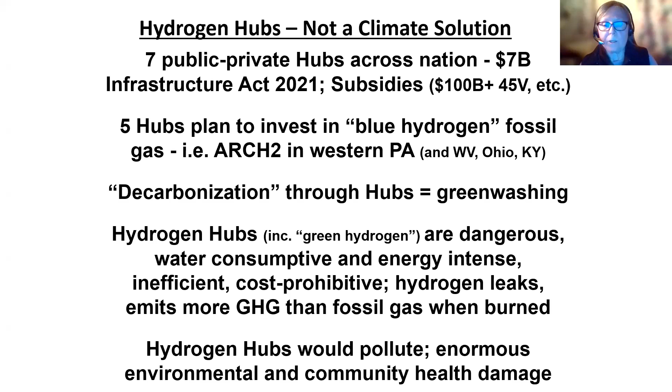So next slide, please, Peter. So the Mid-Atlantic Hydrogen Hub was announced in October in Philadelphia by President Biden. $750 million has been earmarked, but one of the reasons we think we can actually defeat this MACH2 hub is because the money actually has not been given out yet.

They have to jump through a bunch of hoops in order to get the money over the next year or more, and we think that we might be able to derail it. And we're going to work like hell to see that happens.

Reportedly, there are 17 sites. They're located throughout the state of Delaware, southern New Jersey, and southeastern Pennsylvania, including the Delaware River region, which they define as along the I-95 corridor going up to Trenton, New Jersey. They will use nuclear, fracked gas, hydropower, wind, and/or solar, according to the MACH2 abstract. And that's the only thing we have in writing, so we have to go by that.

And that means they will employ what's called blue hydrogen. Again, Professor Howarth will elaborate on that. They will also, quote, reuse and revitalize significant existing pipeline infrastructure and terminals. This was one of their big selling points.

Yes, there's a lot of pipelines, mainly as a legacy of the oil refinery days here in the Delaware River Watershed. They expect to have on build out a production of 300 plus tons of hydrogen per day, and 100,000 plus tons of hydrogen every year.

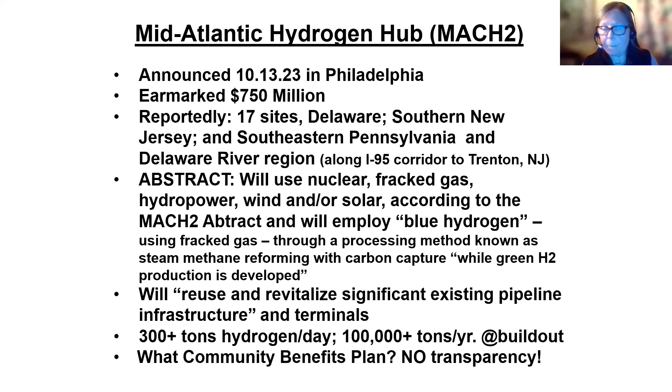Next slide, please, Peter. So a lot of the specifics about MACH2 are under wraps, but we have been ferreting out information, and we're going to share what we know tonight. We're actually going to have a series of webinars as we learn more.

But right now, we know that the sources and the sites of production include the PBF refinery, which is the Delaware City refinery in Delaware. There's actually an existing gray hydrogen plant there now that PBF uses. But PBF, the MACH2 PBF, say they want to build a new hydrogen plant, and they want it to be fueled by on-site solar, hydropower, wind, and nuclear. And they are planning a 600 ton per day output of hydrogen.

Now, the wind power has been delayed because Ørsted has pulled out from building their wind facilities off the coast of New Jersey, and we don't know what that's going to be replaced with. South Jersey Industries was going to harness that for Mach 2. We just don't know what's going to happen with that, and that was their major green power claim to fame.

The PSE&G Salem nuclear plant and Holtec modular nukes are going to be discussed by Maya Van Rossum a little later in the session tonight. And also orange hydrogen is used.

That's where you pump carbon-rich water down into iron-rich rock formations and extract out hydrogen. Sounds like fracking, doesn't it? Well, it does require injection wells. We're learning about that now. We don't know anything about how they would do that here in Mach 2.

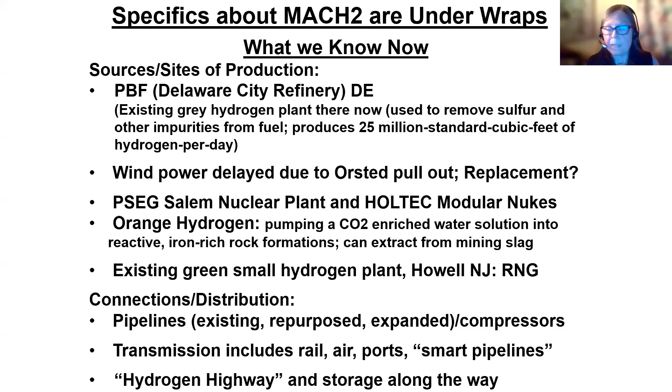So what we do know continued is the end uses. Basically they have plans for industrial, transportation, electric power generation, and residential and commercial end uses. So they do plan to burn it.

They plan mega turbines. And we want to note that it's important that nitrogen oxide pollution from the burning of hydrogen will be exposing frontline communities to an additional burden of devastating air pollution. Burning hydrogen produces six times the amount of nitrogen oxide than burning methane. It's also a powerful greenhouse gas, and of course it's an ozone precursor, and we don't meet federal air standards because of our ozone conditions here in the Delaware River Valley.

It's the last thing we need. Public transit, both in Delaware and Philadelphia, SEPTA and DART in Delaware, plan to fuel and burn hydrogen in vehicles.

Also, they say they're going to build fueling stations along I-95 and truck fueling along the pipelines where they will have storage hubs in order to fill the trucks up and take it to other endpoints, perhaps out of our entire region.

Chemical giants DuPont and Croda in Delaware say they want to use the hydrogen, and they're part of the Mach 2 partnership. Hilco is also a partner, and we don't know how Hilco will be involved. They don't say. It's the former PES refinery in Philadelphia.

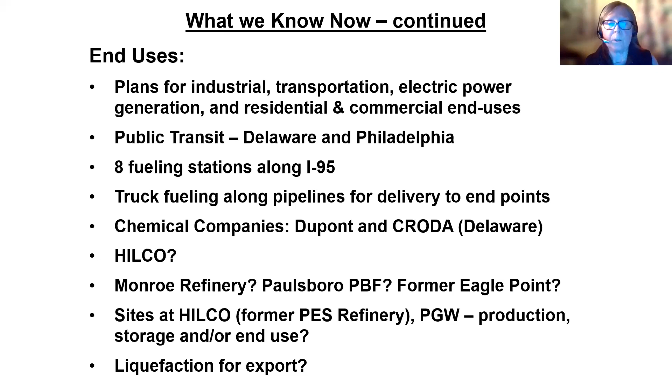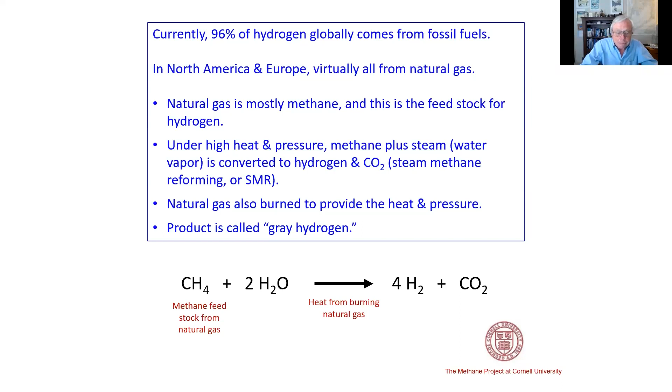That's important to remember. And the product we call gray hydrogen. It's got a large greenhouse gas footprint.

So blue hydrogen is exactly the same thing, except there's some effort to capture some of that carbon dioxide that's created from the chemical breakdown of methane into hydrogen and carbon dioxide. And this is a new term, a new concept. It first came around only 8 years ago. The French company Air Liquide came up with it. Since 2017, particularly since 2018, it's been heavily promoted by this group called the Hydrogen Council.

The Hydrogen Council is 100% a product of big oil and gas. The original members are BP, Shell, Total, Exxon, and their job is to try and sell blue hydrogen to the world. To date, only 2 companies have actually tried to produce this blue hydrogen, one plant in Texas and one in Alberta, and I'll show you some data from those in a minute. Next slide, please, Peter.

A little bit of background first on how this industry marketing campaign came about. We're increasingly seeing that carbon capture and storage, capturing carbon dioxide and permanently storing it, is one of the 'solutions' that the oil and gas industry is throwing around. They're promoting it very, very heavily at COP28 this very moment. This has been attempted for decades for coal-burning power plants, literally going back to the 1970s, and the results simply are not impressive. It's extremely challenging to do.

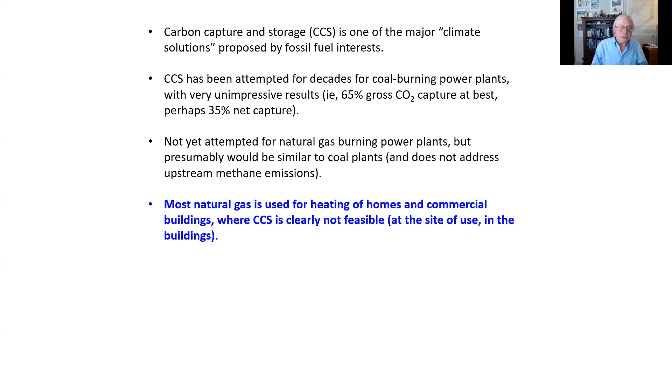To date, no one's really attempted to do this for natural gas burning. I'll come back to that in a minute, but it's probably similar to what coal plants would do. But importantly, most of the natural gas that's used, certainly here in the northeastern US, but also in Europe and across Canada, most natural gas is used for heating of homes and commercial buildings, not electricity production. And no one thinks you can have carbon capture in individual homes. It's clearly not feasible.

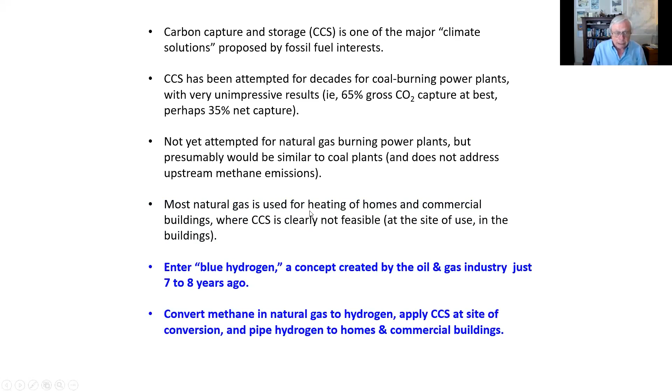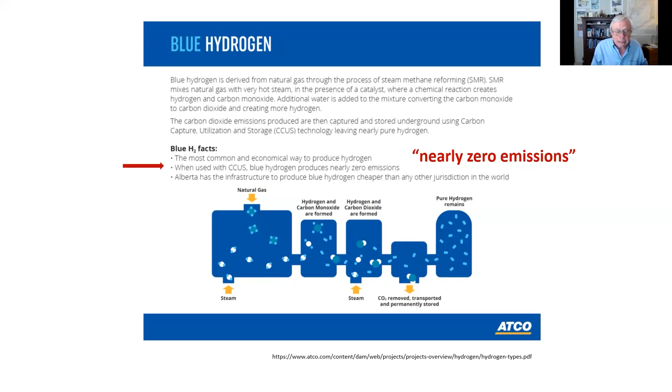Next slide, please. And so that's where this concept of blue hydrogen came in. Again, it's a recent creation from the marketers at Big Oil and Gas. The thought is that we take natural gas at a central plant, make it into hydrogen, do the carbon capture at that central plant, and then deliver hydrogen through pipelines to people's homes instead. So that's where the idea originates. And industry has highly promoted this as a nearly zero emission, sometimes a zero emissions technology, they say. This is from the Alberta company that's tried to do this. Next slide, please.

Well, it turns out that the greenhouse gas footprint of this blue hydrogen is actually quite large. Mark Jacobson, an engineer at Stanford, and I published a peer-reviewed paper on this back in the summer of 2021, not that long ago. One of the very, very few peer-reviewed analyses that looks at either gray or blue hydrogen. There are only two - before our paper there was really only one other paper that ever looked at blue hydrogen. And ours was the first to include methane emissions and not simply look at carbon dioxide.

That's important because when you're using that much natural gas - and again, you're using it as the chemical feedstock as well as the energy source - you can't develop and use natural gas without having some methane emitted even before you get to the plant. It's fundamentally from drilling, fracking, transporting, processing gas, you're going to have some methane leak to the environment. And methane's an incredibly powerful greenhouse gas.

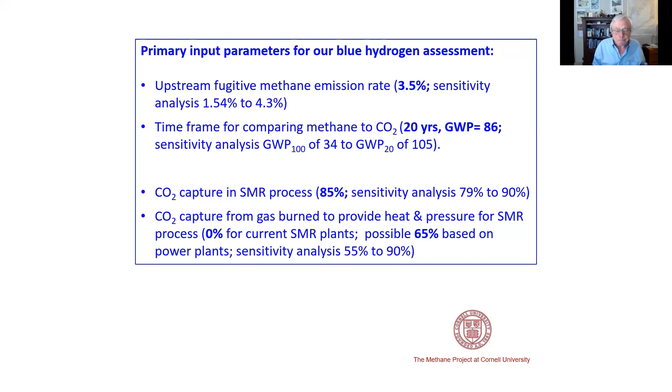And the take-home point is that when you look at gray hydrogen, the traditional hydrogen that's been made for 130, 140 years, and then move to blue hydrogen, the next bar over, blue hydrogen has a slightly reduced greenhouse gas footprint compared to gray hydrogen, but not by much. Those carbon dioxide emissions are lower, but they go nowhere near zero. And the methane emissions are higher because you're using more natural gas to power this whole thing. And again, there are methane emissions associated with that.

And then if we compare with natural gas, diesel, oil, or coal, this blue hydrogen has a larger greenhouse gas footprint than any fossil fuel. You're better off simply burning natural gas if that's your goal in terms of reducing greenhouse gas emissions. Next slide.

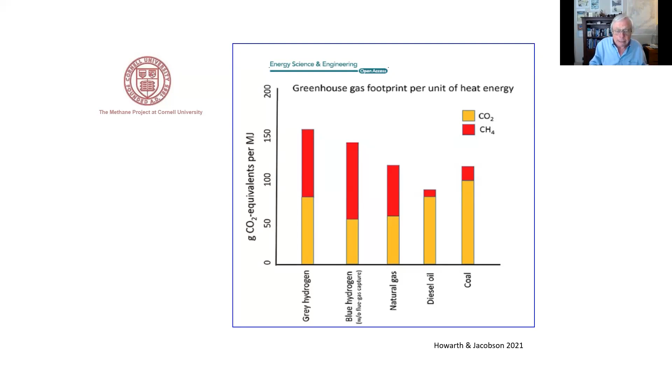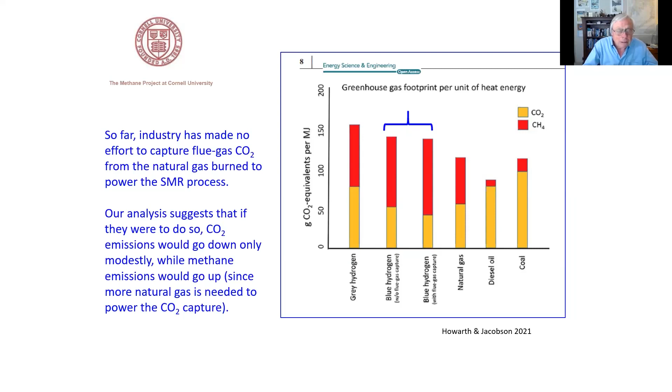We haven't warmed the planet quite that much because some substances, sulfur gases in particular, act to cool the planet. So the net has only been about 1.1 as of a few years ago, it's warmer now. But when you look at the next bar and compare carbon dioxide and methane, carbon dioxide is the most important greenhouse gas, but methane is a close second. In fact, methane is responsible for about a third of all global warming that has happened since the end of the 1800s. So it's really important.

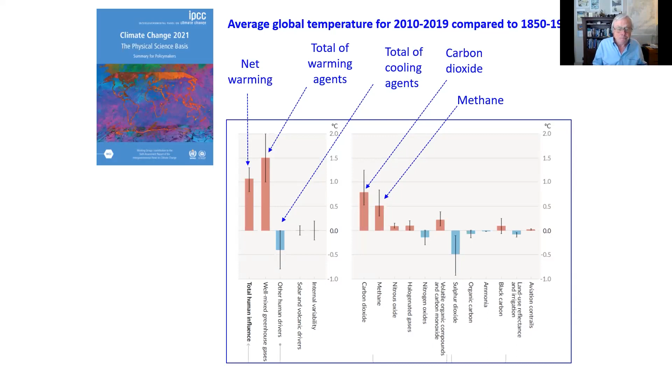And that's what that says. Next slide, please.

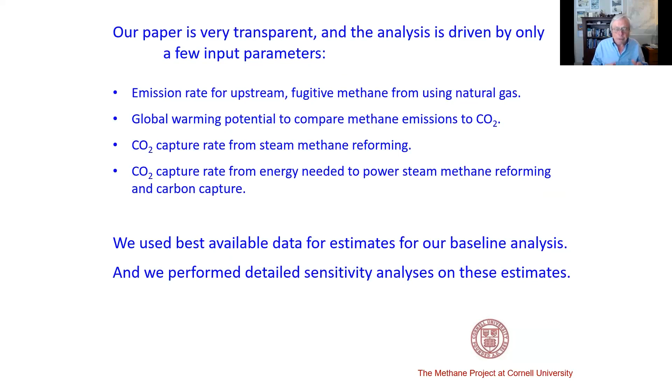So again, our analysis is very simple. It's actually very conservative, but we did a sensitivity analysis as well. I'm just going to summarize that for you.

All of the emission numbers are higher because of those changes. They go up across the board. Bottom line is blue hydrogen is still not much better than gray hydrogen, and it's still far worse than just burning natural gas. And then the best case is if we go down to a very optimistic, I think unbelievably low estimate for methane emissions of 1.54%.

And we look at methane compared to carbon dioxide over a 100-year time period, which undervalues the true damage done by methane. All of the emissions go down, but the fundamental conclusions are still the same. Blue hydrogen in this case is still not that much better than gray hydrogen, and it's about the same as natural gas. Maybe no worse than, but it's no better than either. There's no reason to be making blue hydrogen.

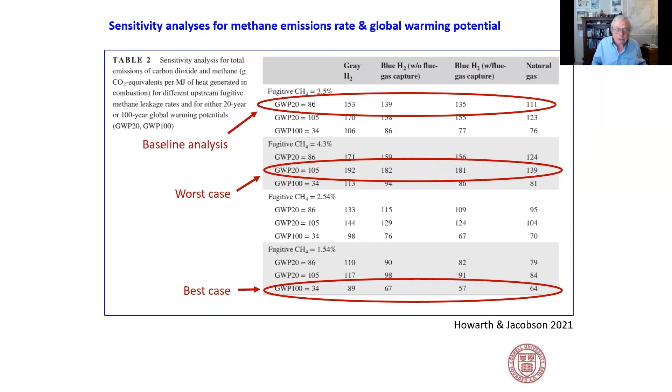Next slide. I'll skip over that, in the interest of time, and move on to the next slide.

I'm quite confident in our methane emissions number, but I wanted to highlight this because the oil and gas industry hated our paper, and social media was alive for months. There was going to be a reply coming out proving we're wrong. That was finally published in March of 2022, and it's a bunch of people with close ties to the oil and gas industry. Basically they had a couple of criticisms, but one was that we use real world data for efficiencies of carbon dioxide capture, and they said we should instead use what industry models it might be able to do in the future, although they've never been able to do.

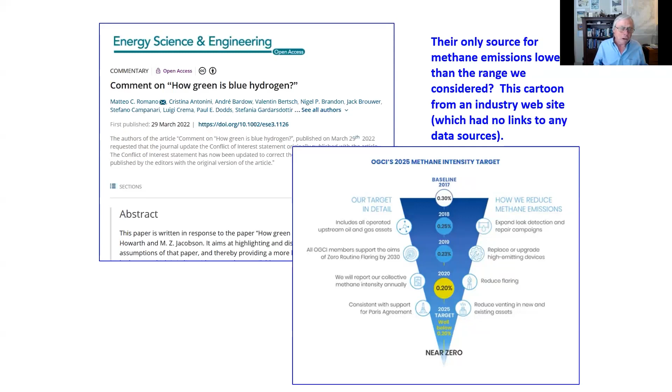So I said, well, okay, believe that if you like, I don't. But the other is they said our estimates for methane emissions were too high. In fact, the only source they provided in their paper indicating methane emissions lower than we used in our sensitivity analysis is shown in this little figure here. It's just a cartoon, from an industry website. This is all that's on the page from that whole industry website. There's no links to any data whatsoever. It simply says that industry is doing better and methane emissions are low, and therefore we're wrong. So whatever. Next slide, please.

Irritating beyond belief. I just want to make one other point. Our analysis gave low estimates for the greenhouse gas footprint of hydrogen in that we did not look at the role of hydrogen directly itself. At the time, we weren't really thinking very heavily about that. There's been a lot of science in the time that our paper came out, which is only in the last 28 months. But even though hydrogen itself is not a greenhouse gas, putting hydrogen into the atmosphere does increase global warming because it affects other greenhouse gases, particularly methane.

It makes methane hang around in the atmosphere longer, creates more ozone, and puts more water vapor into the stratosphere, which warms the planet as well. So we didn't include that. Things are worse than we thought. And by the way, if you think methane emissions and leaks are bad, hydrogen is far worse. It's a smaller molecule, the smallest molecule in the universe. It's very slippery, very leaky, very hard to contain. It will leak. Next slide.

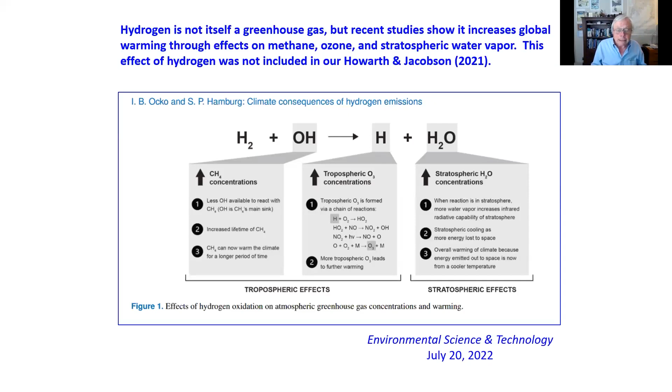Just one or two more points: blue hydrogen's terrible from a climate perspective. I hope you have been convinced of that.

I want to point out that in the past, hydrogen's use has been almost entirely as a chemical feedstock, not really as a fuel. Progressive energy planners have been talking for the last decade or so about a role for hydrogen in an energy future for uses which are really hard to decarbonize, things like making steel or maybe air travel. They're talking about green hydrogen, which is made from renewable electricity to electrolyze water and break it down into hydrogen and oxygen with no carbon dioxide involved.

So this whole idea of blue hydrogen is again a new creation of oil and gas. I hope we're killing the idea. They paid a little bit of attention when our paper came out in 2021, and one response in the fall was to drop the blue hydrogen language and start talking about clean hydrogen and clean energy, confusing green and blue hydrogen. You see that throughout the hydrogen hub planning that's been going on.

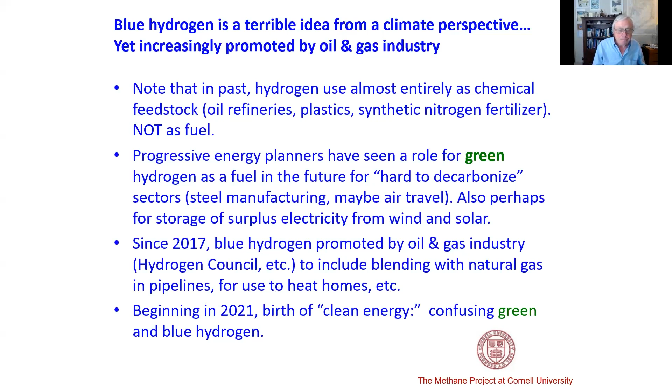So blue hydrogen should have no future at all in our energy future. What about green hydrogen? Even here, I think green hydrogen's been wildly overhyped. It's been carried along by the marketing folks at big oil and gas. So I think there is a role for green hydrogen, but it's much less than many people have suggested.

I want to make sure that you understand that we should never use hydrogen of any sort for heating homes and buildings, which is still being promoted by the oil and gas industry. There are a variety of reasons for that - it's unsafe, it's untested, but on top of that, it's also extremely inefficient.

The take-home message is renewable electricity is a hugely scarce, precious resource when we're trying to decarbonize our energy over the next decade or three. If we use electricity directly to heat homes with high efficiency heat pumps, you get 3 to 4 to 5 times more heat energy out of that than you're putting in from the renewable electricity.

If you take the same amount of renewable electricity and make hydrogen, transport it to the home, and burn it for energy, you're losing half of the energy. So the efficiencies are hugely different. Bottom line is using electricity directly for heating gives you 6 to 10 times more heat energy in your home than if you play around with hydrogen and all of the danger that's involved in that.

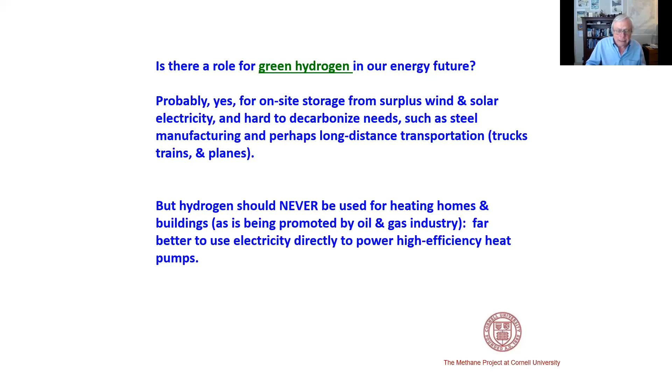I said most of that already - that's just a lot of detail, that's the fundamental message I wanted to leave you. There's a lot of other details to why we shouldn't be putting hydrogen into gas pipelines. We can talk about that at the end.

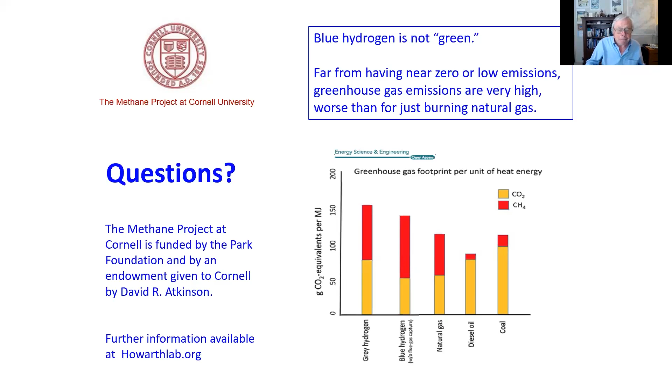So, Maya, all yours. Thank you, Dr. Howarth, I really appreciate it, and thank you for all that really helpful information and dispelling a lot of the myths that the MACH2 Hydrogen Hub folks have been proposing or advancing.

So I'm going to focus a little bit on the direct nuclear footprint of the proposed MACH2 Hydrogen Hub, which mainly is going to come from the Salem Nuclear Generating Station, but there may be other elements.

First, people want to know what pink hydrogen is. I have hot pink slides - I'm sure that woke you up. It's intended to, because it's scary stuff. So what pink hydrogen is, is where the breaking down of the molecules in order to create the hydrogen is generated through power that comes from nuclear energy.

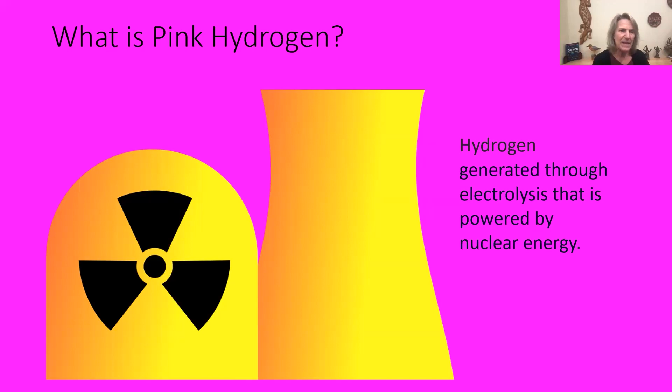According to the information provided at the MACH2 briefing on October 25th, they asserted that the only power sources that were going to be used for the hydrogen hub at MACH2 was green, pink, and orange. They ignored the fact that their own documentation and paperwork, as Tracy said right at the beginning, made clear that natural gas is actually going to be involved in this.

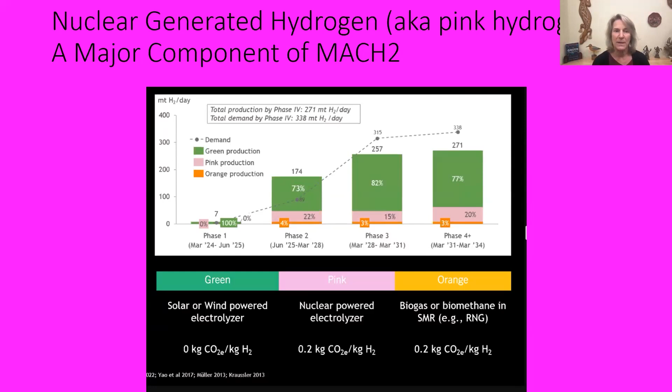Next slide, please. So when we think about where this nuclear energy is going to come from, and what the footprint of that nuclear energy will be here in our Delaware River Basin, Pennsylvania, New Jersey, Delaware region, there are two sources that the MACH2 folks have talked about. First and foremost, PSE&G is involved, and they specifically talk about the Salem Nuclear Generating Station.

The Salem Nuclear Generating Station is located on Artificial Island in Lower Alloways Creek Township in Salem County, New Jersey. This facility has been around since the 1970s, and it has a very significant environmental footprint, which we'll get to in a second. But this is going to definitely be a significant source of the nuclear power that would fuel the MACH2 hydrogen hub.

The next source of hydrogen that they talk about, or primarily focus on in their materials, is the construction of what they call small modular reactors that are going to be manufactured and installed around the region. Exactly where, we don't really know. That's yet to be seen. But I did actually get a call today from a reporter asking about the proposal from Holtec International, which is the partner in the MACH2 hub that would be primarily responsible for this, as we understand it.

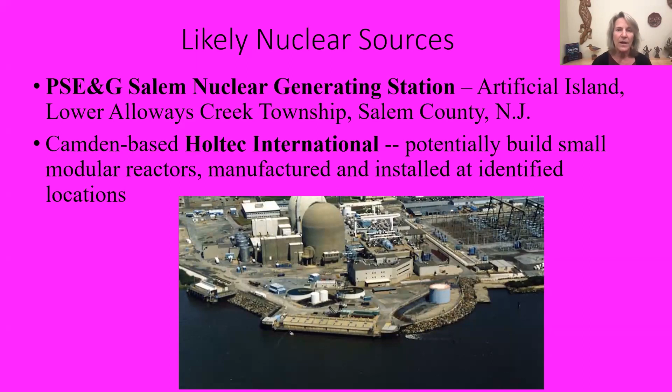Next slide, please. When we think about Salem and the footprint impacts of the Salem Nuclear Generating Station, the primary impacts are the fish kills at Salem. Because Salem was constructed and has been allowed for decades to continue operating with outdated technology, it has an outsized footprint on the aquatic life in the Delaware River and estuary.

At the Delaware Riverkeeper Network, the way we characterize it—and this is true if you look at all the numbers—the Salem Nuclear Generating Station is the largest predator in Delaware Bay when it comes to aquatic life. The harms it inflicts outsize any other source of take for aquatic life in the Delaware River and estuary. In fact, the Salem Nuclear Generating Station kills over 14 billion, with a B, fish, eggs, and larvae every single year. It's a massive footprint.

Salem Nuclear Generating Station also discharges superheated water into the Delaware estuary ecosystem, heating the water around that discharge, which has significant ecological impacts. There are some pollution discharges from the facility, and nuclear waste is of course generated at the Salem Nuclear Power Plant. That waste, as far as we know, is stored on site, either in pools at the facility, or in outside land storage operations that are part of the Salem Nuclear Power Plant compound.

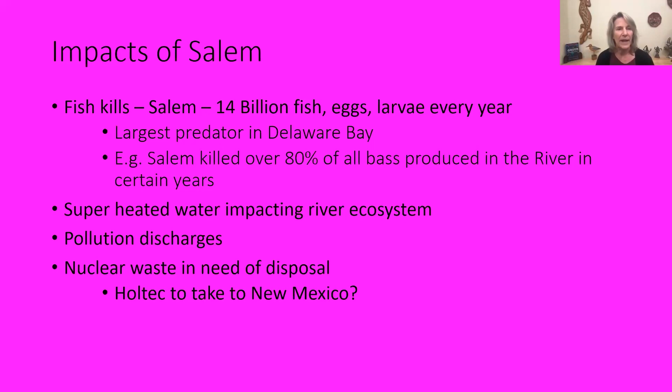As nuclear waste builds up at Salem or at any of these other operations, even these modular sites, it's got to go somewhere. Holtec is looking to take it to the people in New Mexico. And the Delaware Riverkeeper Network, as so many others, are 100% opposed to that.

One of the things to know about Salem and this footprint, through the construction and operation of MACH2, if that were to happen, and we believe it will not, we believe we will defeat it. But if it were to happen, it is going to extend the footprint of harm at the Salem nuclear generating station.

Because it is very likely going to extend the life of the Salem nuclear generating station. Actually, the two parts of the generating stations, units 1 and units 2, should have already shut down. They originally were supposed to be shut down in 2016 and 2020. In 2011, they got a 20-year life extension. They're now proposed for shutdown in 2036, 2040.

If this hydrogen hub were to advance, we are sure that the Salem nuclear generating station would get a massive new life extension. So this 14 billion Delaware River fish eggs and larvae that are killed every year, the superheated water, the creation of nuclear waste that has to go somewhere—all of that is going to expand and continue well into the future if MACH2 is allowed to happen.

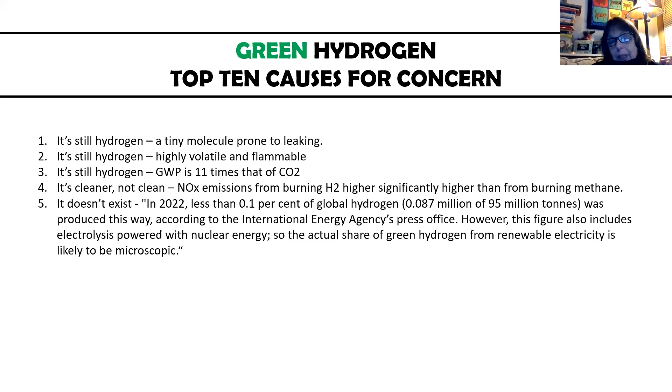There are other problems with it. It's very water intensive. Throughout its life cycle, each megawatt hour of green hydrogen consumes at least 5,000 liters of water. Compare that to solar, which uses 20 liters per megawatt hour, or wind, which uses just 1 liter per megawatt hour. Production could deplete water supplies in drought-stricken areas, and that's something very important to keep in mind.

But it's also very renewable energy intensive. According to European Commission estimates from the EU report that just came out, 500 terawatt hours of additional green electricity will be needed to reach the EU's 2030 domestic production goal of 10 million tons of green hydrogen. That is more than all the electricity consumed in France or Germany in 2022. It's also more than all the wind power generated, and nearly 2.5 times all electricity from solar power produced in the whole European Union that same year. So we're talking about requirements that are extraordinary.

I bring that up because in a hearing held yesterday, someone from the renewable energy sector talked about how improbable it is that we could ever have enough renewable energy in place quickly enough to even consider green hydrogen. Right now, Pennsylvania lags behind the rest of the country overall in renewables, but with respect to renewable electricity, we have roughly 3% made from renewables. New Jersey has 2%, and Delaware has 1%. These are all figures from 2021. So we're not producing anywhere near the amount of renewable electricity we would need to even power green hydrogen in the first place.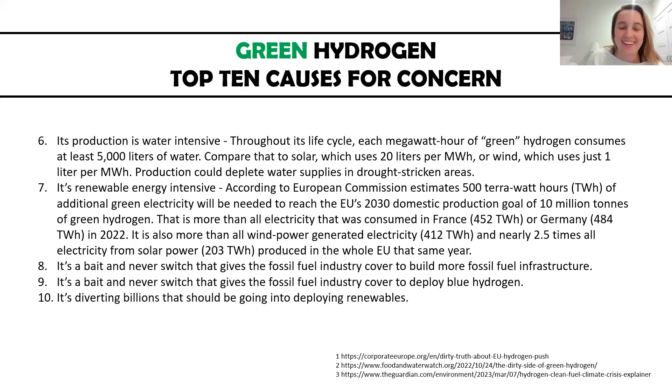So I'm going to start with a question that Maya kind of addressed, but maybe Karen, Tracy, you want to talk about it: this idea that everybody who got info from the DOE thought MACH2 was going to be all green or totally no fossil fuels. So people seem to wonder why we're talking about fossil fuels in MACH2. Well, the original abstract given to the federal government as their application for MACH2 being included in the chosen hubs says they're going to use blue hydrogen. It says they're going to use natural gas. There are other places this has been said, particularly by the building trades in various contexts, but it's clear they've said, as Karen said as well, that while we develop our renewable resources, we're going to use blue hydrogen. But they also say they're going to use it as part of the permanent plan.

Now, Maya mentioned the briefing held in October, and Colin O'Mara, who is the chairman of MACH2, made a lot of statements about how this was going to be green. That was before Ørsted pulled out. So we don't know. He said he was going to supply a new abstract stating that blue hydrogen was not going to be used at all, and we have never seen that. We have filed Freedom of Information Act requests with the Department of Energy to get it. We have never seen it. So we have to go by what the public has in hand, which is the written document—the abstract and application from the MACH2 partners to the Department of Energy.